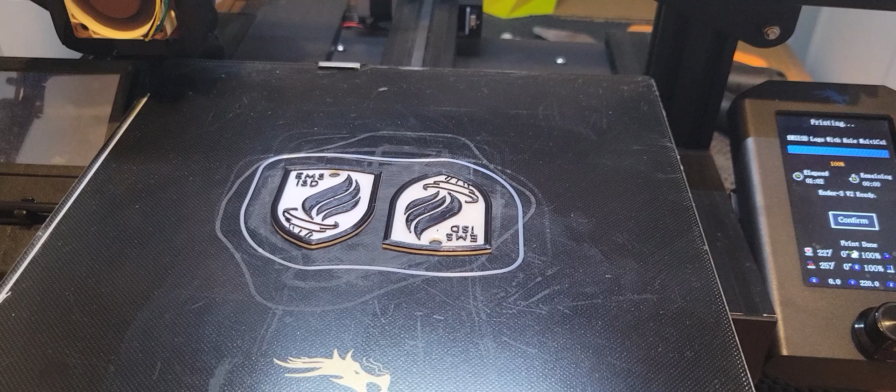Hi, this is Ricky, and if you want to make multicolored prints like this, I'm going to show you how.

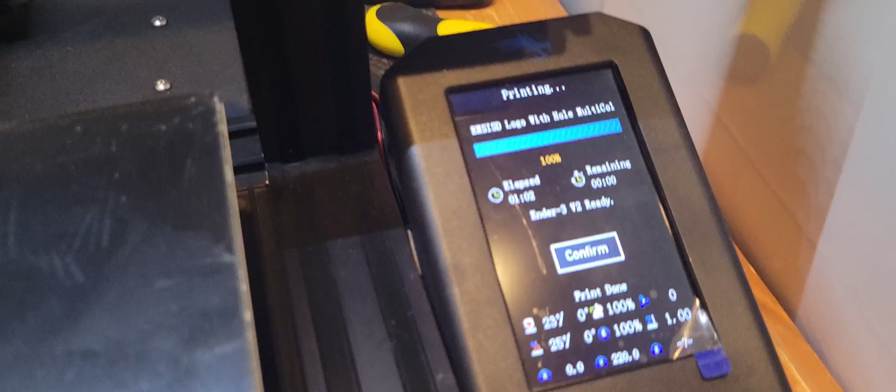Instead of using the pause at height, we are going to use the Filament Change plugin. So, some prerequisites: I have an Ender 3 V2, and I am running the Jyers firmware.

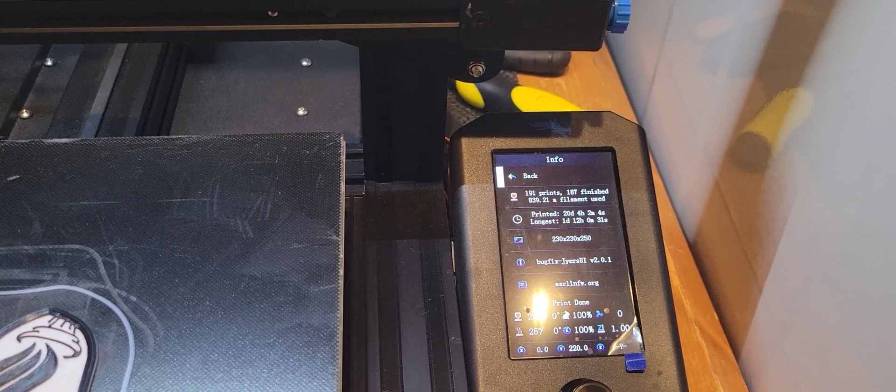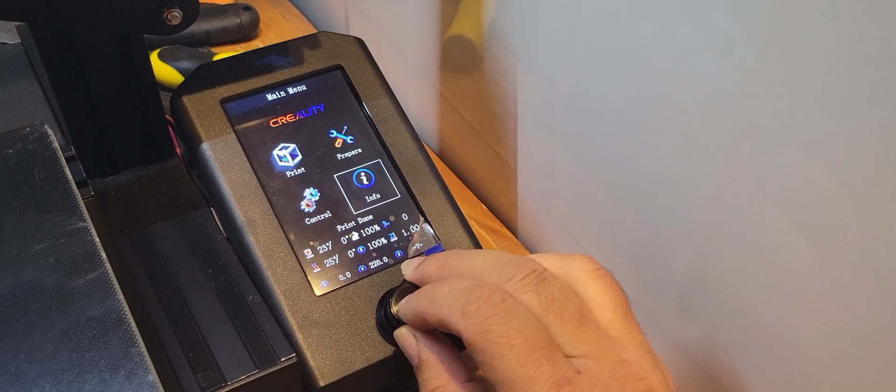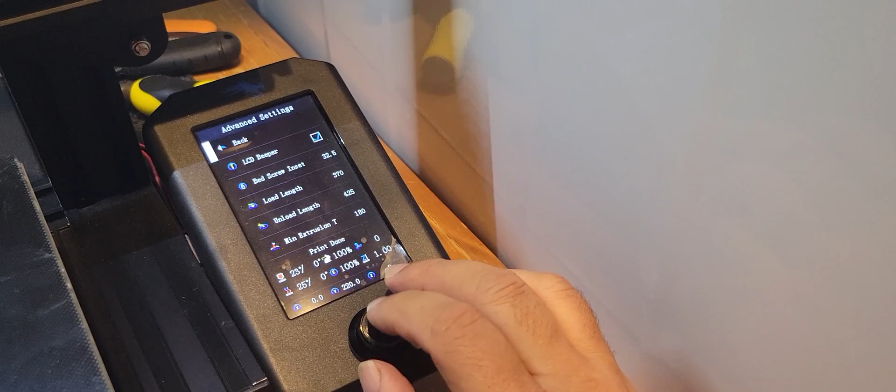One of the things I like is under Control, there are advanced settings. I changed my loading length to 370 and my unloading length to 425.

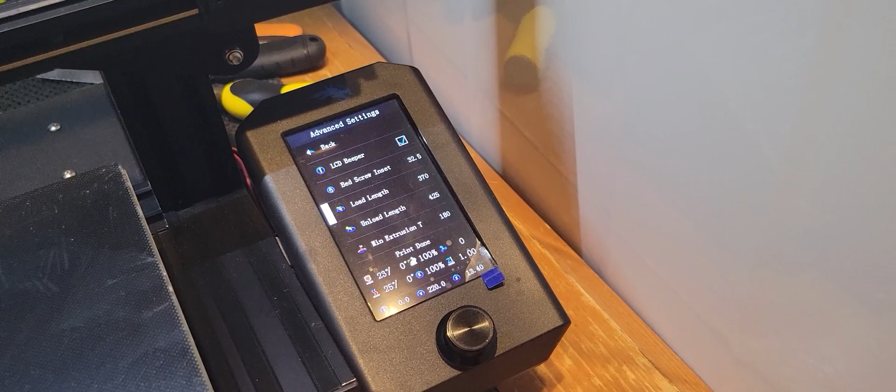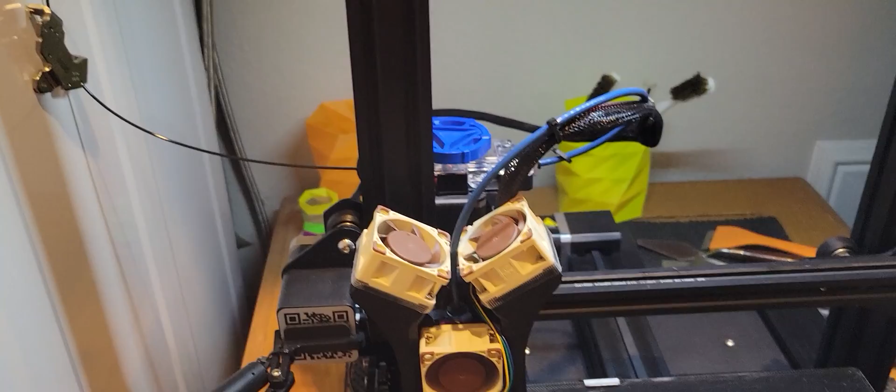So knowing that, I just finished this print. The black is the current filament it is pulling through, so I need to change out the black and replace it with white.

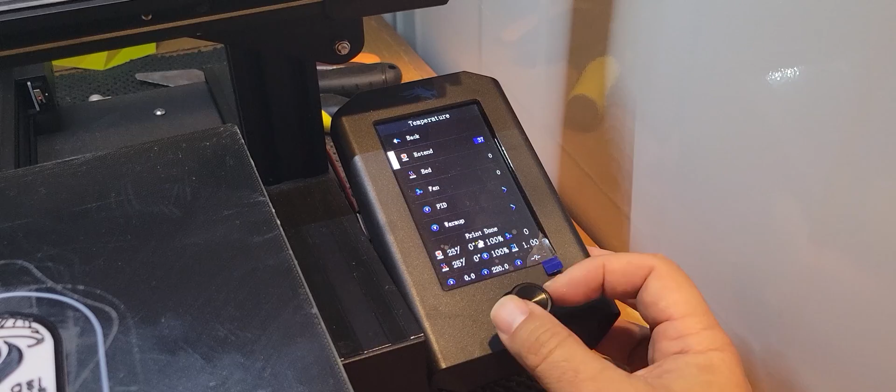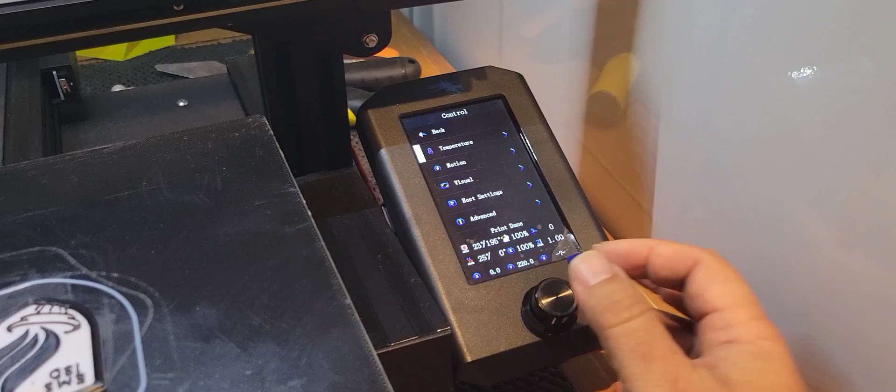The same G-code I use in Cura, we're going to do the filament change. First, go to Control, then Temperature, and heat up the hot end. I heat mine up to 195. As soon as it reaches that temperature, you push the release lever on your extruder and pull out the filament. That's how I've done it for years.

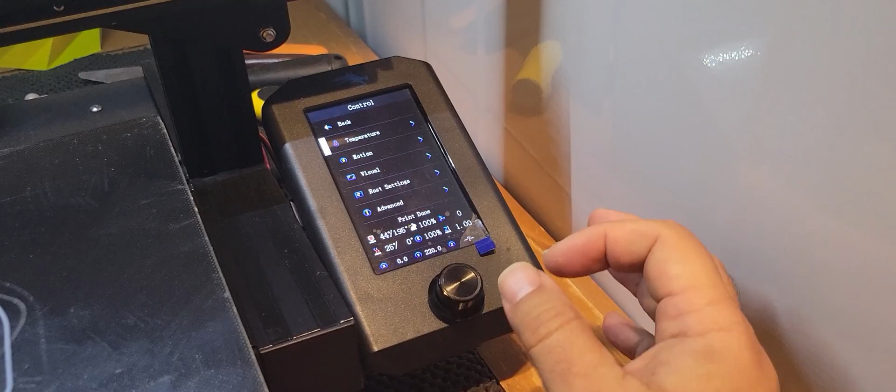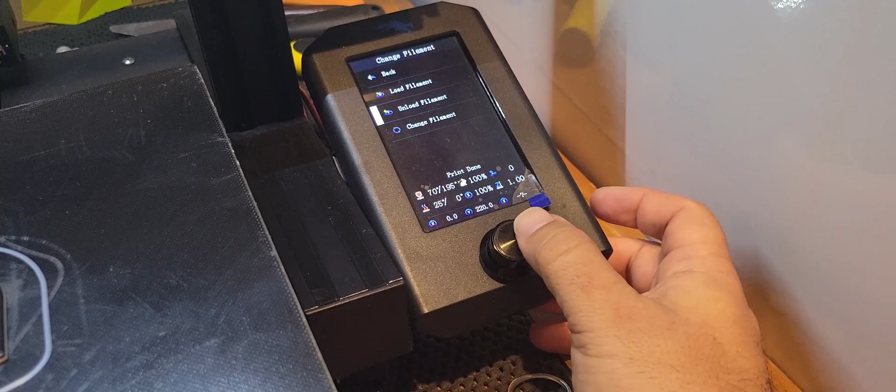But with the Jyers firmware, it introduced a neat setting called Change Filament. Here I can click Unload Filament. Let's get this out of the way.

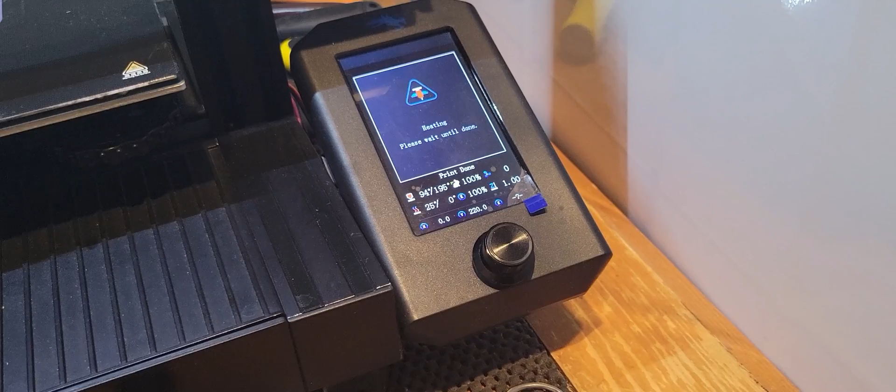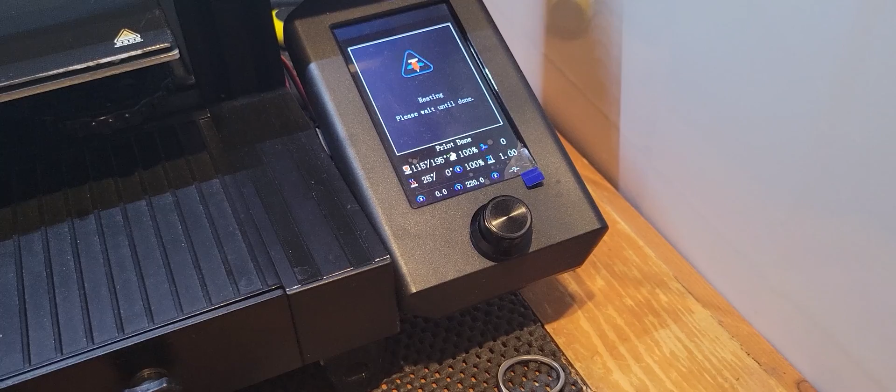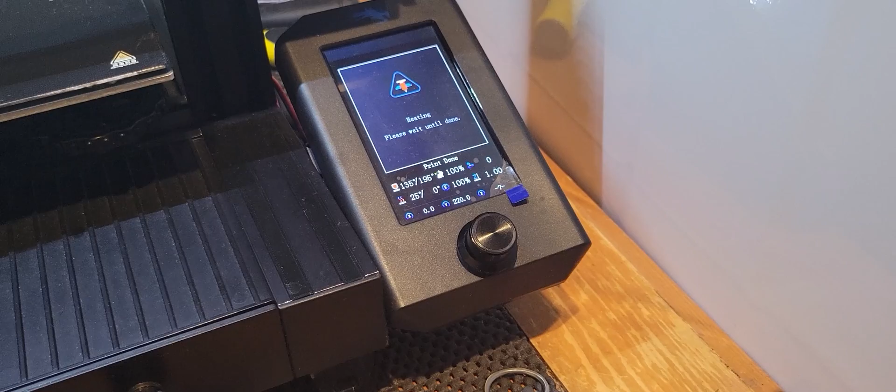When I click Unload Filament, it says, hey wait a minute, you're in the middle of heating, no big deal. As soon as it reaches 195, it raises the gantry up, and then pulls the filament 420 millimeters out, and I'll be able to pull it out and put in the white filament. I can almost do this one-handed, while one hand holds the phone and records, while the other does most of the stuff. So we'll wait until it reaches 195.

Okay, it reached 195. It raises up the gantry and starts pulling the filament out.

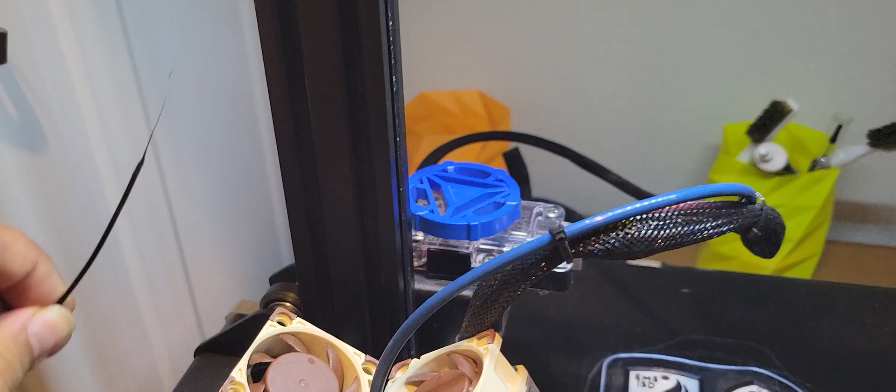Now that it's finished, one-handed, I just grab the filament, pull it out, and now I'm going to replace it with the white filament.

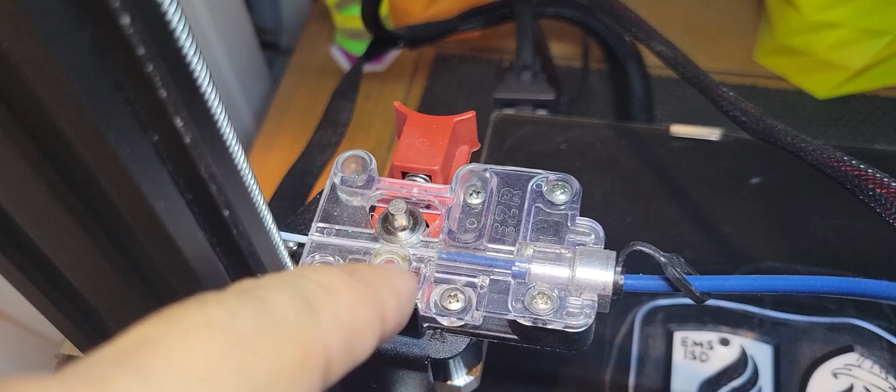Now that I have the white filament inserted, I only have it just until it reaches the Bowden tube. I'm going to go to my menu, and now I'm going to click Load Filament.

Now you're going to see it pull 370 millimeters of filament in. The reason I picked that number is towards the end, maybe about 10 millimeters or less, the extruder slows down. That's pushing it way too fast for my hot end to melt.

Just about the time it reaches the hot end is when it slows down, and it only purges a little bit. But using the filament change makes it much easier to purge rather than me having to hold on to the gantry and push the filament through.

So there it slows down, and then I look underneath here and you'll see it's pushing out the black filament. You can see that. And then the white filament's just now starting to go through. It's kind of gray.

I like to come over here and it says, do you want to purge more filament? I'm going to click confirm, and then go back over here. Usually I have to do this once or twice, and then now I can see it has purged just about all of the black filament and only white filament is going.

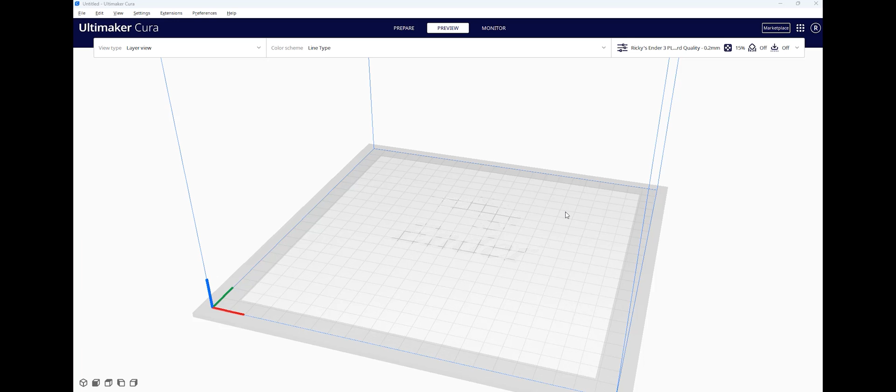So now we can go to Cura, and I can show you how to set this up. I have Cura 5.2.1 opened up, so I am going to load the model. It looks just like this.

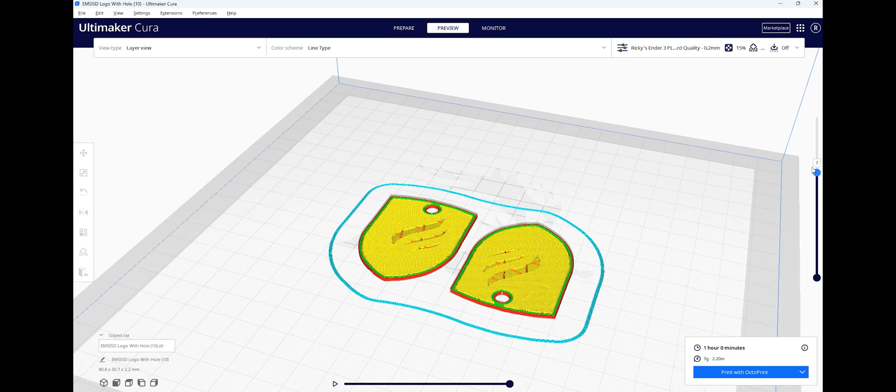What I need to do first is slice it and go up here to Preview, and I need to see right there what layer I need to switch the color from white to black.

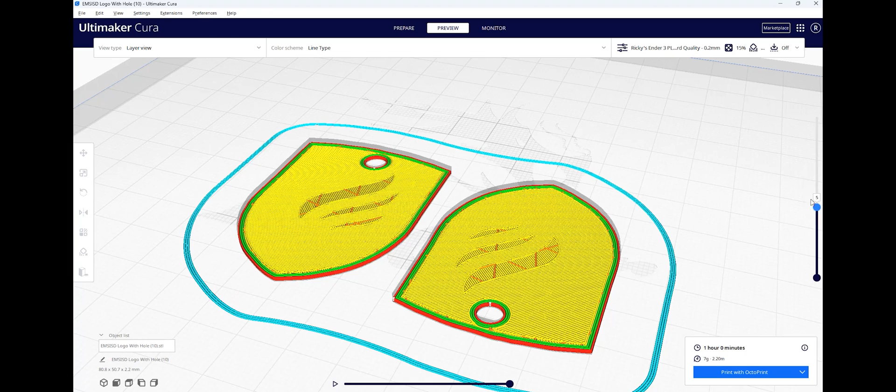So layer 7 is the last layer I want white to be, and layer 8 is the layer I want to change the filament. Okay, so after you figure out what layer, and I need it to change at layer 8, you're going to go up to Extensions, then down to Post-Processing, then Modify G-Code.

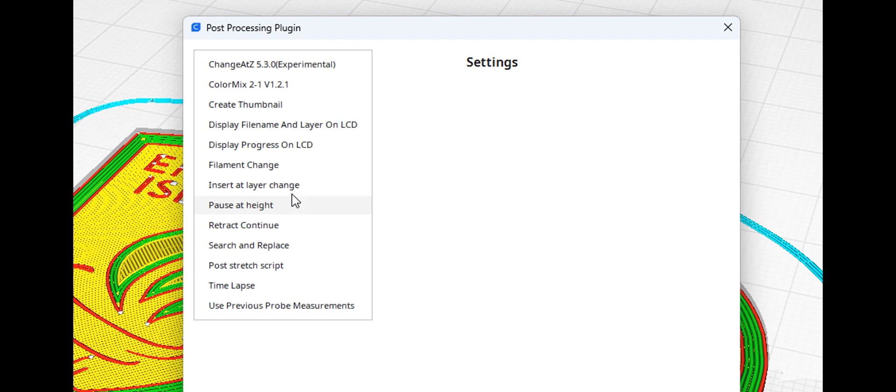Just about every tutorial video tells you when you add a script, you're going to use the pause at height. I like the filament change script much better. I think it's a lot easier.

So for the layer, it's going to be layer 8. That's where I want it to change.

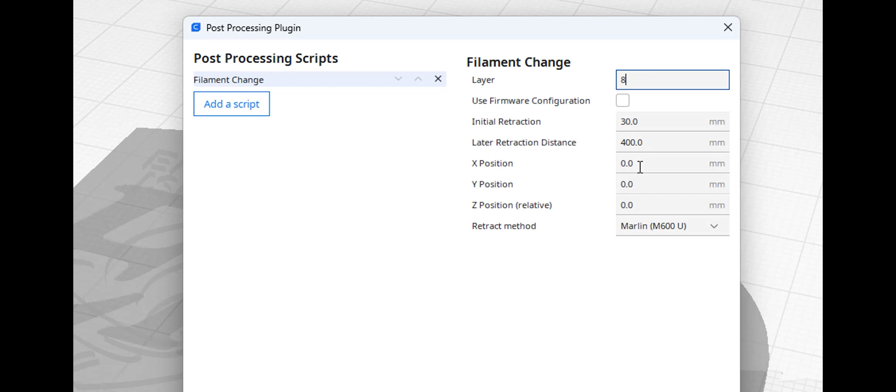Here, I went in and changed the script a little bit. The original retraction distance was 300, but I know on my printer setup that 400 completely retracts the filament all the way. Leave everything else at 0, and then close this out.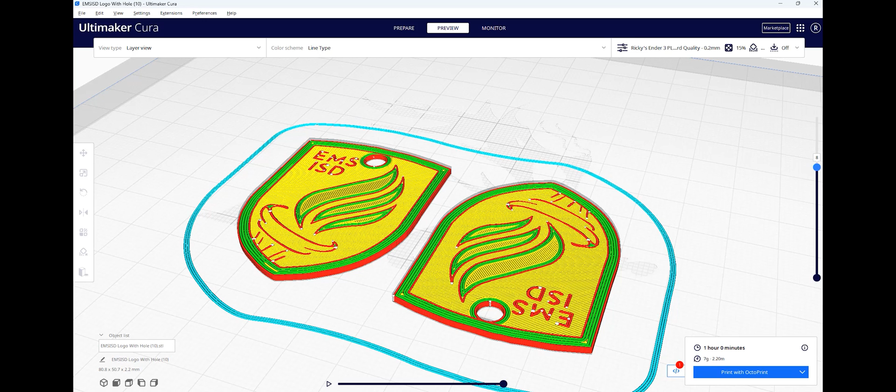You'll notice that I have a script here, so I'm going to click Slice. And I know that here is the model, and I know at layer 8, it's going to run the filament change script. So I'm going to change out the white, put in the black, and then it's going to continue printing. So all I need to do is hit Print with Octoprint.

All right, it looks like it's just about finished with layer number 7.

Now you can see it's going to lift up the gantry. It's going to park the head at 0, 0. And then if you notice the extruder motor, now it's going to back out the filament 400 millimeters.

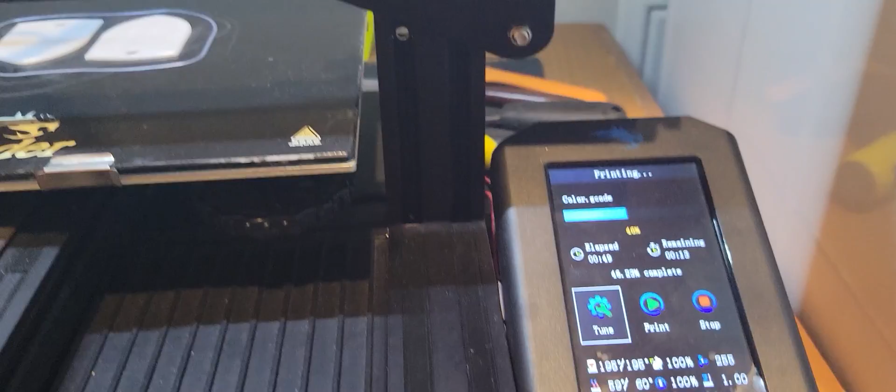This is what the screen says. Still doing its thing. It's backing out the filament still.

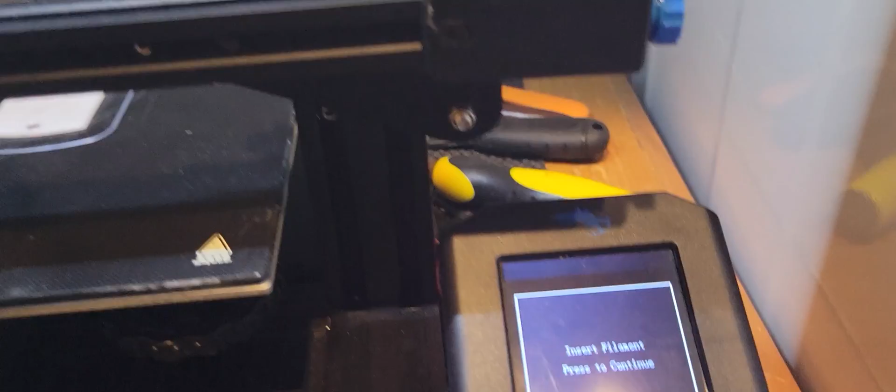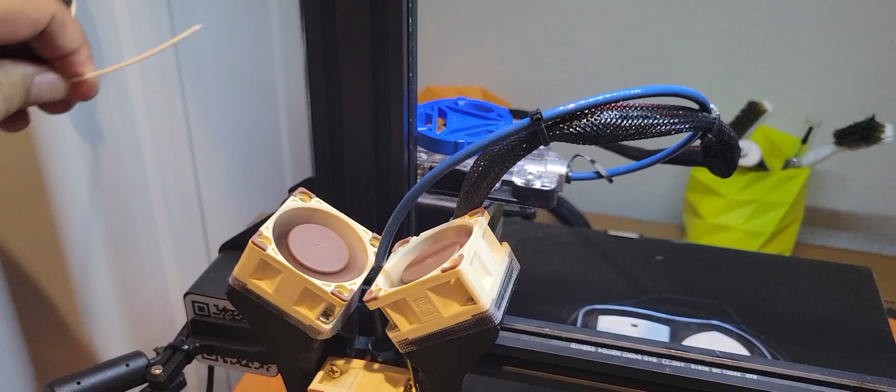Now on the screen, it's saying to insert the filament and press to continue. Well, I still need to take out the white filament and then insert the black. So I'm going to take out this white filament. Just going to cut the end real quick.

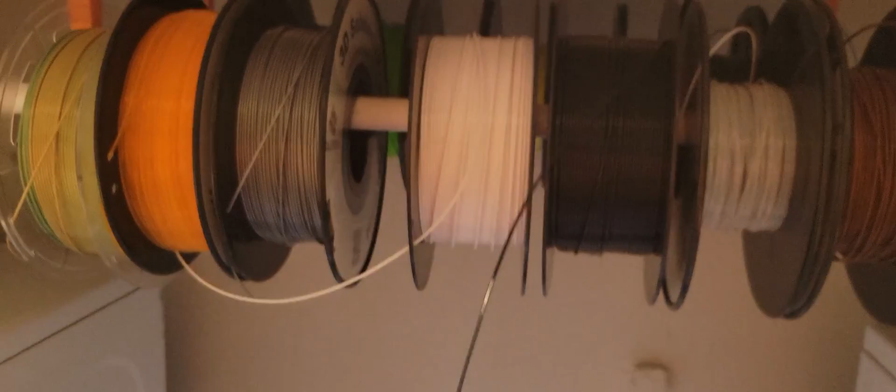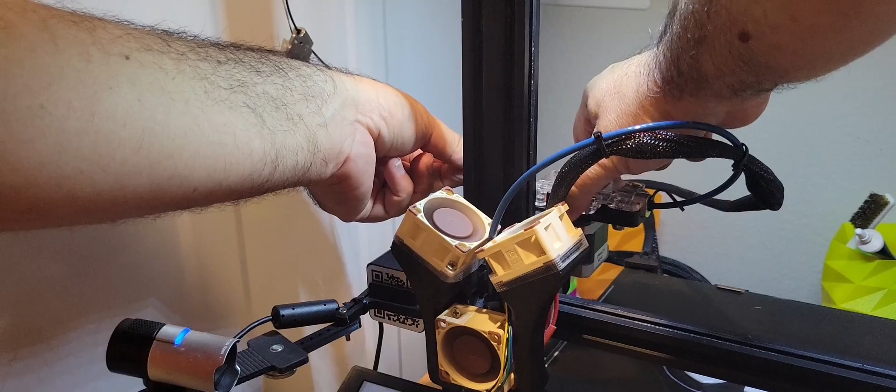All right, I'm going to grab my black filament and feed it through. Just get it started. So on the EZR Struder, I put the filament until it just enters the bowden tube.

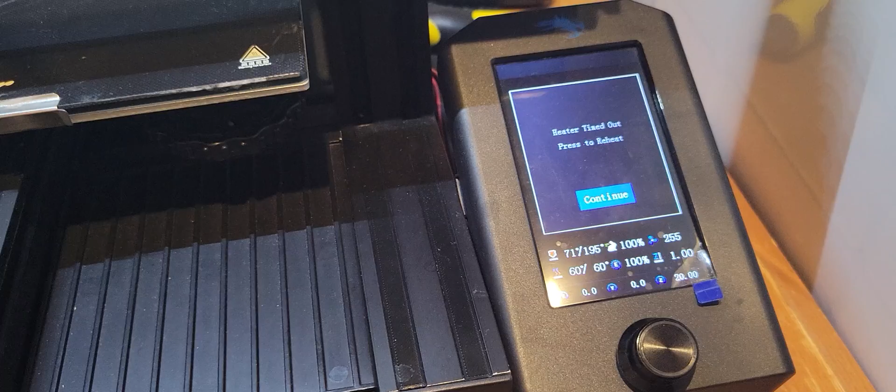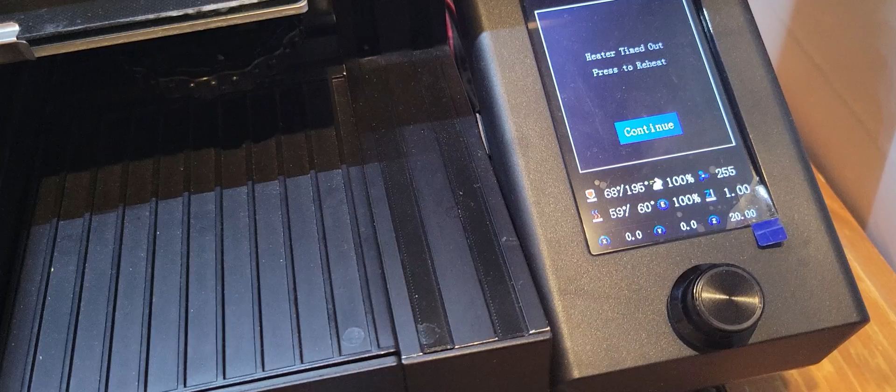All right, if you take a look at the screen, if you don't switch out the filament fast enough, the change filament feature has a really neat feature where it keeps the bed heated, but it turns off the heater on the heat block. So I'm going to go ahead and hit continue, and then it's going to say, hey, wait a minute, the hot end isn't hot enough, so it's going to go ahead and heat up the hot end.

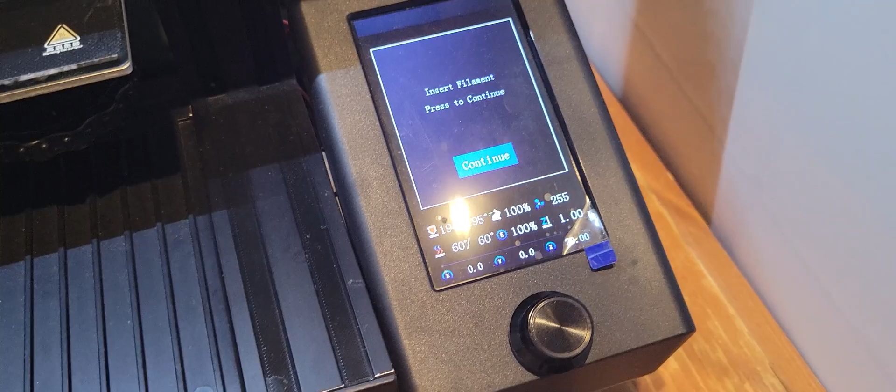All right, once the hot end reaches its temperature, once you insert the filament, I've already done that. So I'm going to click continue. And then what you'll see is the extruder motor going pretty fast as it is pushing the black filament all the way through the bowden tube.

And what's nice is how I have it set up is the last, I don't know, 10 millimeters or so, the extruder motor slows down. This you're just going to have to play with to get yours set up the right distance, because at first I had the number too high and it was clicking. It was trying to push out filament faster than the hot end could melt.

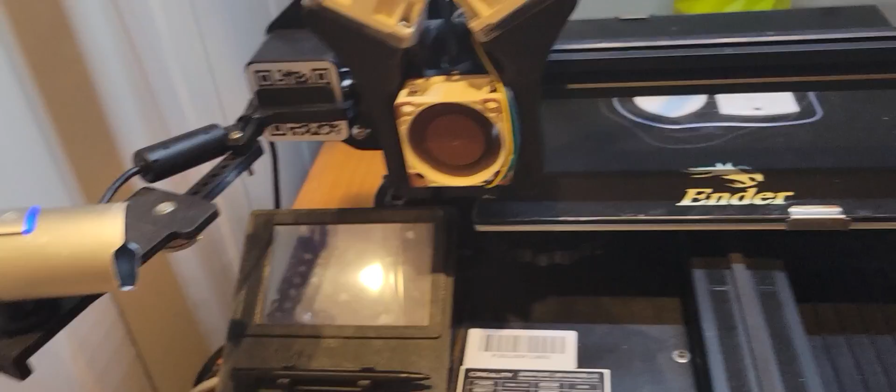So when it gets to about the last 10 millimeters, notice how it slowed down. And then if you take a look at the extruder, you can see it start to push out some of the white filament, and there comes the black.

So what I usually like to do is, it says, do you want to purge more filament? Yeah, I usually purge once, maybe twice. So I go back over here. It's going to push most of the white out.

And as soon as it's done, I'm going to pull this out. And then I'm going to click cancel because I don't want it to do any more. It immediately goes and starts printing again. But now it's going to print with the black filament.

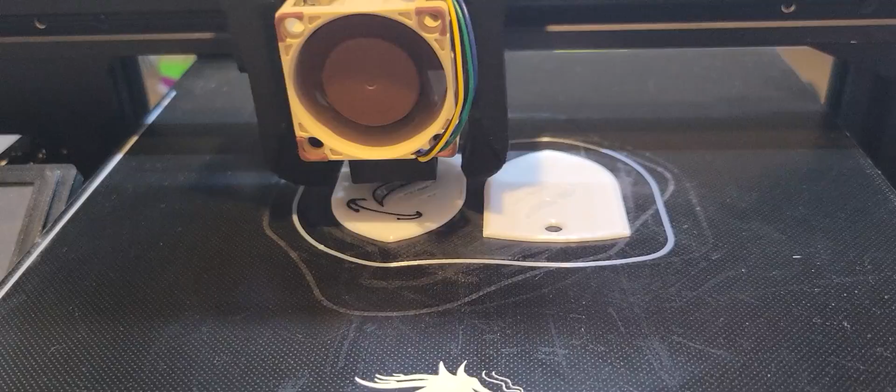I really like this method of changing the filament rather than the pause at height, because I'm not messing with the gantry so much. It automatically retracts the filament, and all I need to do is just pull that filament out and put the new filament in.

Sometimes what's happened when I've done this is I'll accidentally bump the gantry, or I'll rest my hands on it, not even trying to, and the Z motor isn't locked in place, and it'll slide down just a little bit.

With this method, I'm not pulling the filament out, I'm not pushing it in. The extruder motor does all of that. So I think using the change filament G-code is a lot easier and more simple than the pause at height.